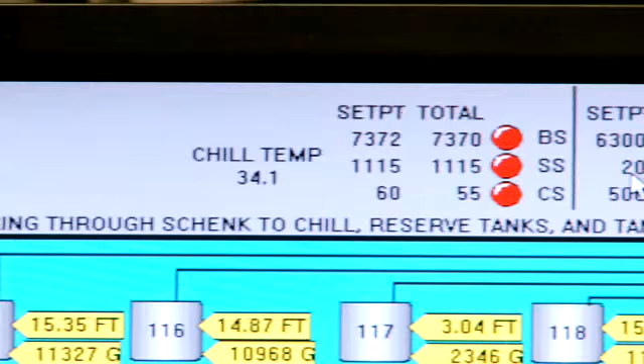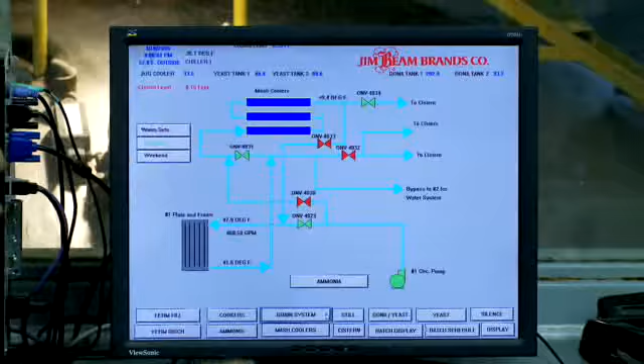When Jacob Beam moved to Kentucky and sold his first barrel of bourbon in 1795, he had no way of knowing that he was laying the foundation for an enduring family business, creating what would become the world's best-selling bourbon. Today, Beam Global Spirits and Wine owns 9 of the world's top 100 premium spirits and is the largest spirits company based in the United States and the 4th largest in the world.

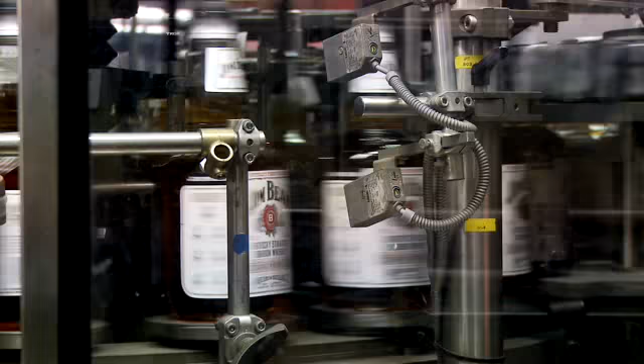Jim Beam Bourbon has stayed true to its original recipe for over 200 years, and as time and technology marched on, the manufacturing processes at the Jim Beam facility have kept pace. This brand-led company relies on strong leadership to invigorate and enhance the company's way of working. Since 1992, Wonderware has been Jim Beam's partner for automation and information software solutions, supported by Wonderware Cincinnati, the local Wonderware distributor.

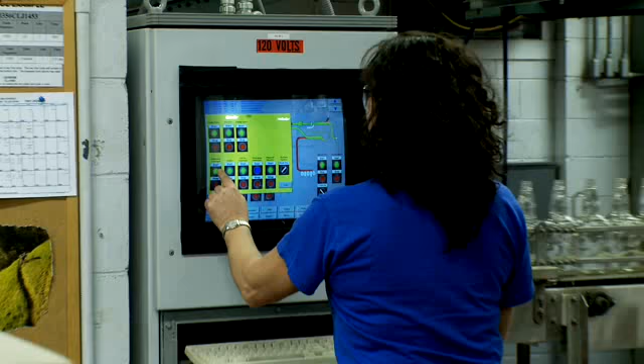Originally, Wonderware software was chosen because of its ease of use and its ability to interface with existing PLCs. A lot of the operators were hesitant when we first introduced Wonderware, but we found that the ease of use is highly important to us with our operators.

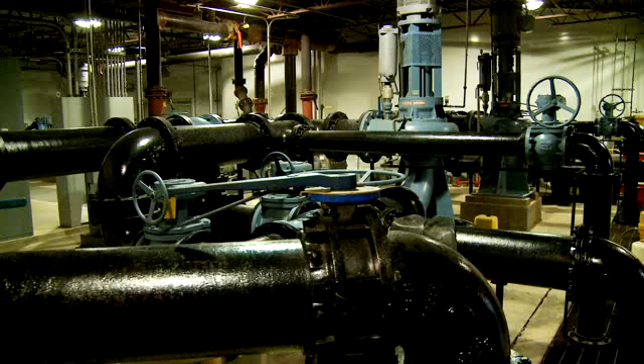As we've implemented it in certain areas and the implementations have gone well, we've expanded that into other areas. The first area I believe it was implemented was the distillery, and we expanded into our processing and bottling areas. So as we're finding that Wonderware is easy to use and is providing us the data and information that we need, and we're able to control our processes consistently, we continue to implement and integrate that throughout our entire system.

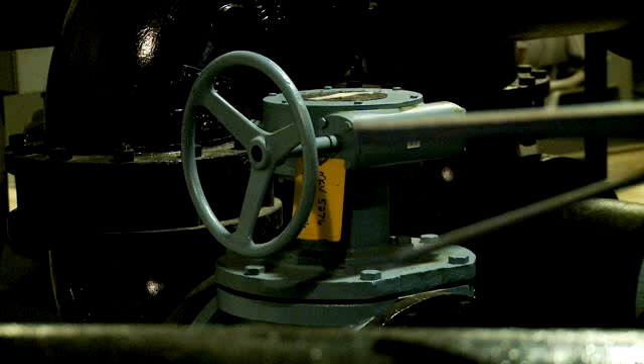As the strength of Wonderware software became apparent to the folks at Jim Beam, it was integrated throughout the plant and has become the software standard.

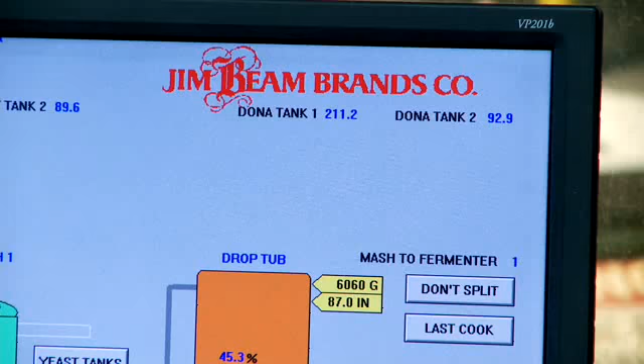In 1994, the dry house at Clermont was automated using InTouch HMI. In 1995, the first InTouch software was added to the bottling line. In 1996, the distillery at the nearby Booker Noe plant was automated using InTouch HMI.

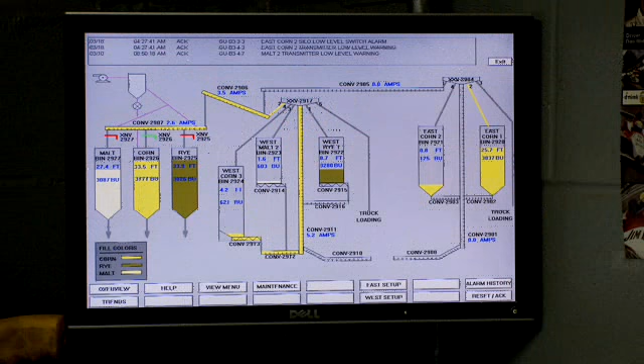The Wonderware Historian software was added in 1997, and once the usefulness of the Wonderware Historian's real-time and historical database capabilities became apparent, the software was added to the rest of the plant. This database tool, coupled with Wonderware Active Factory Trending and Analysis software, have been used for quality and troubleshooting throughout the plants ever since.

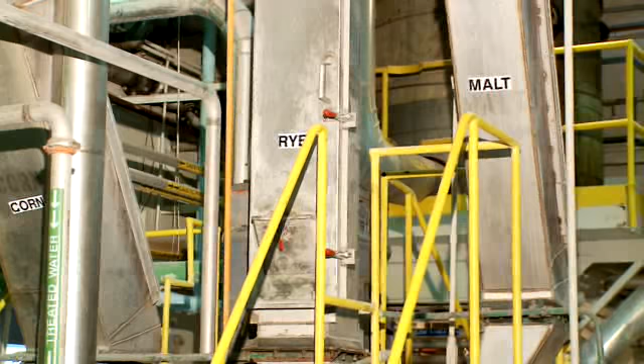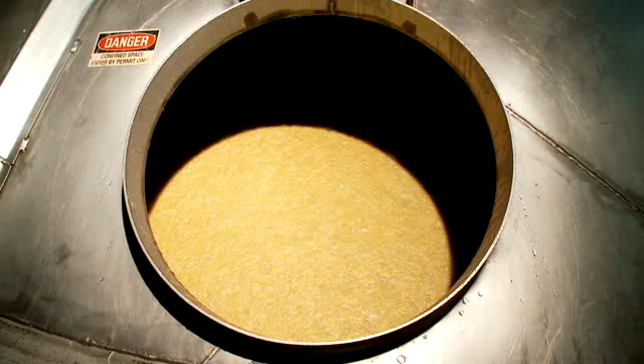AppServer is a galaxy where all the information resides - we have the boiler, the dry house, and the distillery. InSQL stores all the trends together, and that's one global database for a historian. AppServer does the same thing with the tags, which makes it easier for communicating back and forth between the different operations.

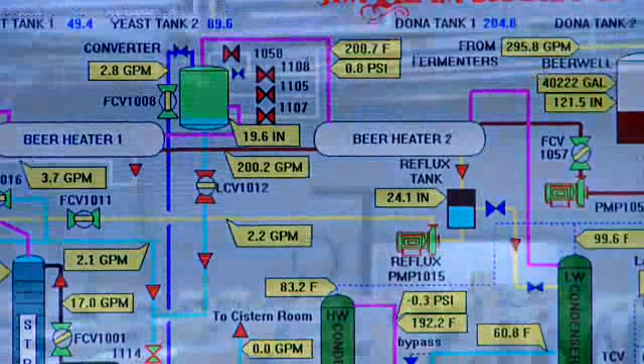In 1998 and 1999, InTouch software was added with the automation of the Jim Beam facility's water and wastewater treatment plant. In 2001, InTouch HMI was included in the automation of the chilling process.

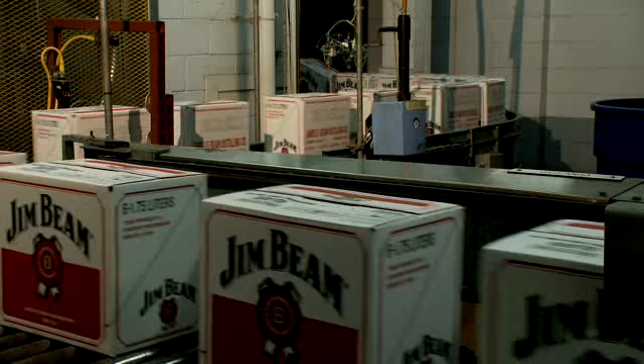In 2003, terminal services for InTouch software was added as the visualization software on 2 more bottling lines. Also in 2003, the Wonderware Industrial Application Server was chosen for the expansion of the Booker Noe plant.

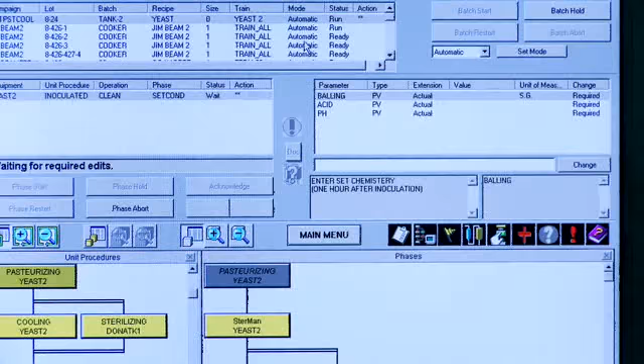The Jim Beam facility in Clermont, Kentucky produces a number of well-known brand spirits, including Jim Beam Bourbon and Knob Creek Straight Bourbon Whiskey. One of our goals in building brands that people want to talk about, it's important that we align ourselves with partners who share some of the same philosophies and goals. And we feel that through our partnership and relationship with Wonderware, we've been able to do that.

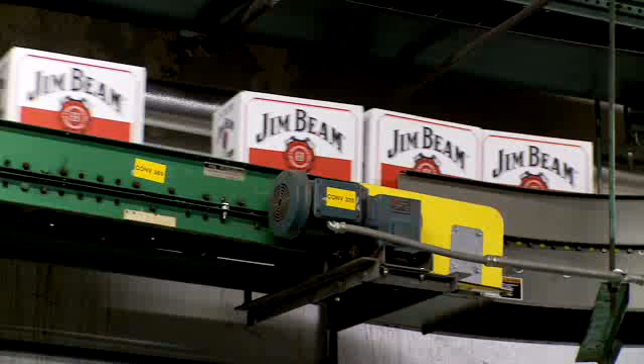2 of the critical underlying principles of Beam Global are to uphold high principles and social responsibility and to strengthen our partnerships. Working together with Wonderware helps enable Beam Global Spirits to bring their vision to life, uphold their commitment to responsibility, and have a true working partnership with Wonderware to build brands people want to talk about.

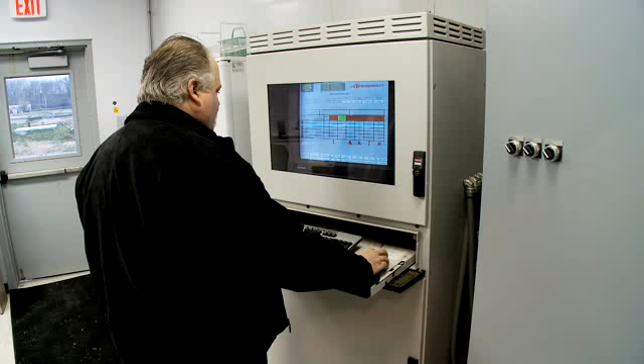I guess our biggest factor when we first started was understanding our process and trying to get it to the computer. Our process was based off of a lot of manual work, and that transition into the computer took us a little while.

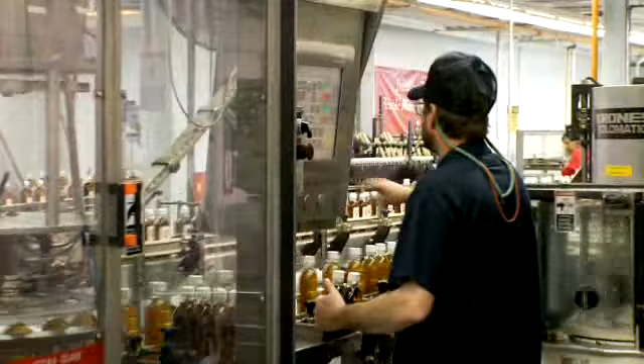But for the operators to be able to run it, they adapted quite well. Within a month, they started to input ideas to make it a little bit easier to run. And between the work of our engineering department and your tech people, it came together.

Wonderware software solutions are integrated throughout the production process, from the water plant to the boiler house, from the distillery to processing, and finally the bottling line.

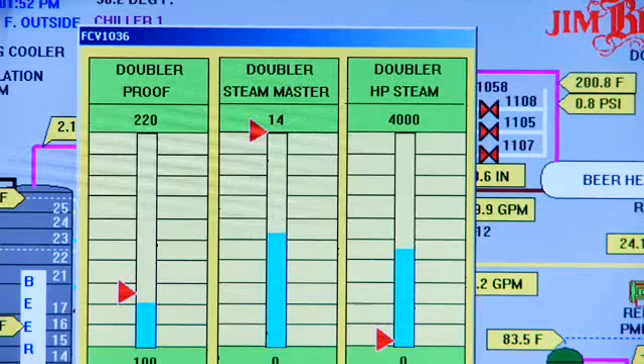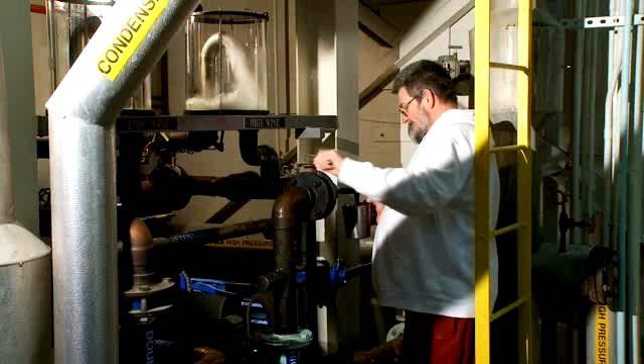But things weren't always so automated. One of the main reasons we installed it was for automation. Prior to Wonderware being installed, a lot of the processes were manual. We would have to manually turn on valves, switches, pumps. It allows the operators, instead of being in different areas, to control the process from one location, and through that provides us a lot of consistency.

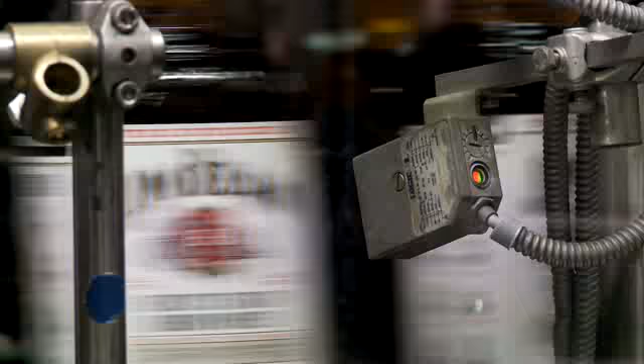In the beginning, one of the issues we had was the inconsistency in our mashing process. They were always up and down. So with Wonderware, we were able to get a consistent drop in materials into the cooks. The cook times were more regulated. Vast improvement. Throughout the plant, at every step of the process, Wonderware software is an important tool.

The process begins by bringing in corn, rye, and barley malt grains. Even at this early stage, Wonderware software is used to distribute the deliveries of grain to specific silos. The grains are milled and mixed with water to form a mash. This mash is heated to convert the starches to grain sugar. Yeast is added to the cooked mash, which results in fermentation and the conversion of the grain sugar to ethyl alcohol and carbon dioxide, forming distiller's beer.

Wonderware InBatch software controls the cooking and fermenting. The beer goes through the still where the alcohol is separated from the grain. Here, Wonderware InTouch software is used to control the entire distillery. From there, the alcohol is put into new charred white oak barrels where it is aged for up to 10 years. The bourbon in the barrel is dumped, chill filtered, then bottled and shipped, ready to be enjoyed in moderation by responsible, legal drinking age consumers.

Wonderware software's ability to control every aspect of the plant's production helps Jim Beam run a consistently high-quality product more efficiently and have a more profitable business.